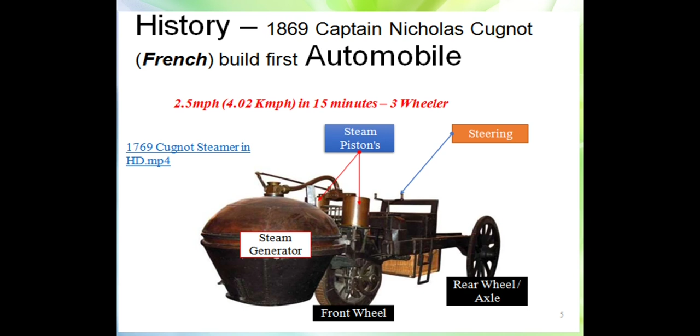History of automobile: automobile actually started with the innovation of the wheel. It is one of the major milestones of human history after the finding of fire. The first automobile was built by Captain Nicholas Cugnot in 1769 through a steam generator, with a speed of 2.5 miles per hour. It is one of the most innovative inventions - the first self-propelled vehicle.

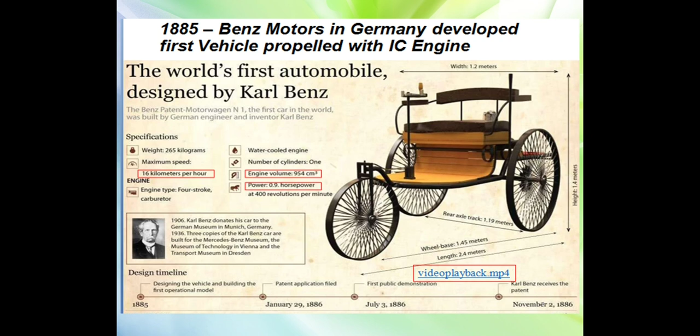It's called the IC engine. It was developed by Benz Motor in Germany in 1885.

In 1897, Foster from Crompton Greaves brought the first motorcar to India. In 1901, Jamshedji Tata had the first Indian-owned motorcar.

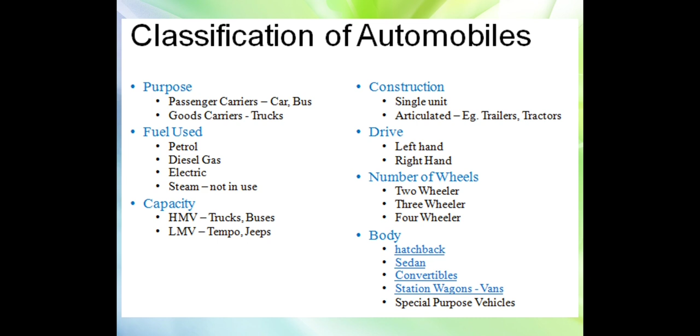The classification of automobile: automobiles are classified by purpose, fuel used, capacity, construction, drive, number of wheels, and body.

Main components of automobile: the engine - it is the heart of the automobile, the source of power. The frame and chassis - it supports the engine, wheels, body, braking system, and steering system. All the components are supported by the frame only.

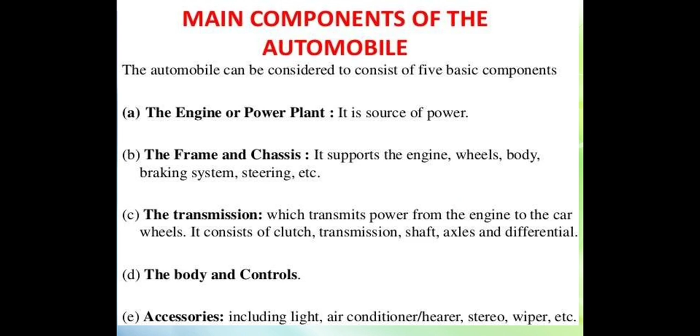The transmission transfers power from the engine to the rear wheel. It consists of the engine, clutch, transmission, shaft, rear axle, and the differential unit. Body and control - this includes the control system and accessories including lights, air conditioning system, heater, stereo and wiper, etc. Now let's look at the exploded view of the automobile.

Look at the exploded view of the automobile: cylinder, gasket, engine block, cylinder gasket, head gasket, engine block, oil pan gasket, and the crankcase - another name for this is oil pan. Inside are the exhaust and intake manifold. Another term given is the valve arrangement mechanism.

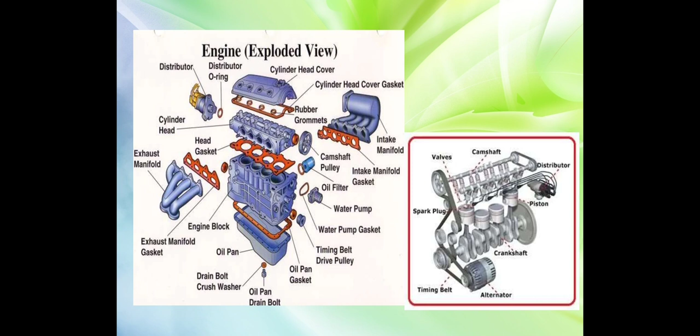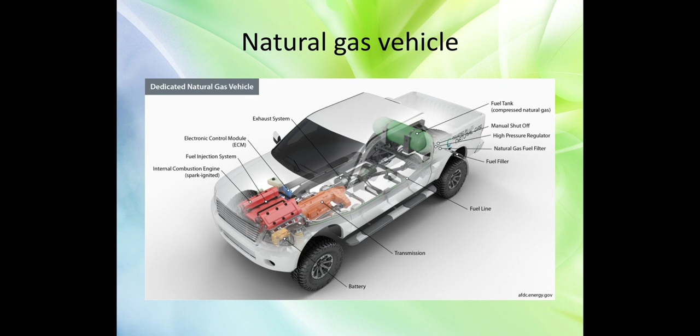Next we discuss recent developments in automobiles. Natural gas vehicles have recently been developed. Natural gas vehicles in India are also contributing to this natural vehicle trend. The reason we are moving to natural gas vehicles is to reduce emissions from vehicles.

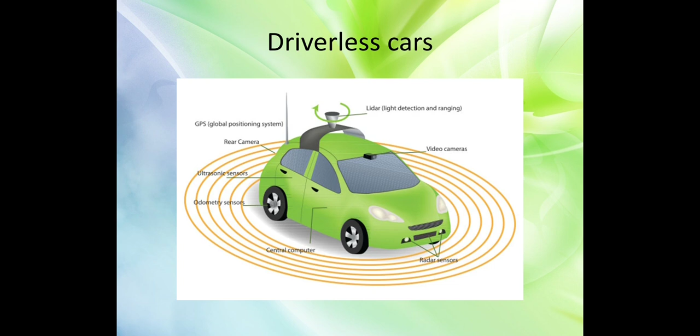Driverless cars - Google has already developed these and successfully run them in Japan, the United Kingdom, and America. India does not yet have sufficient infrastructure. Once good infrastructure is developed, it will be possible to drive driverless cars in India.

Bulletproof cars are generally used for political leaders and many VIPs. Anti-lock braking system (ABS) is recently developed. The Indian government has imposed on companies that they must build in ABS for all vehicles after production, starting in the year 2017. With ABS, it gives perfect control of the vehicle while driving.

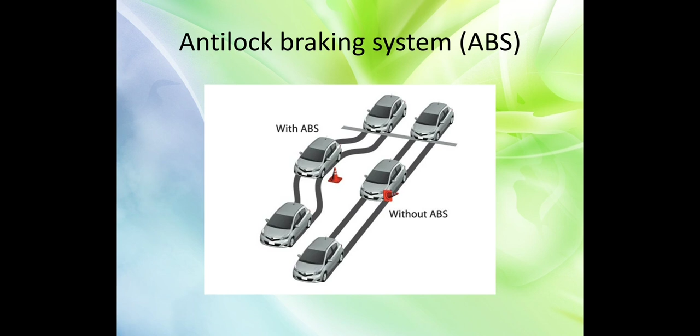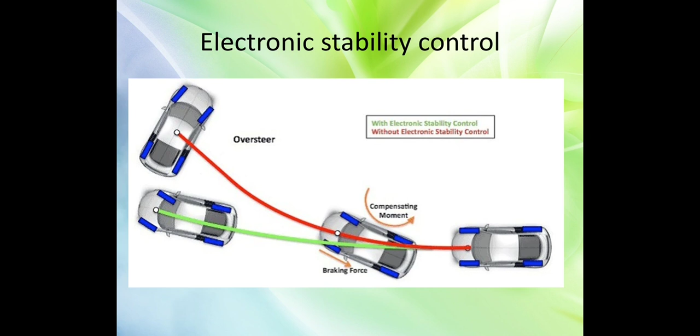Electronic stability control - nowadays even in a minimum price car, around 8 to 9 lakhs, electronic stability is built in. It monitors the contact between the road and tire at high speed and on wet surfaces. It gives perfect control and ensures vehicle stability. This is one of the developments.

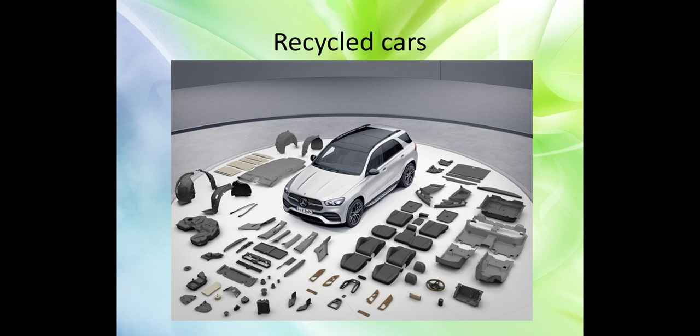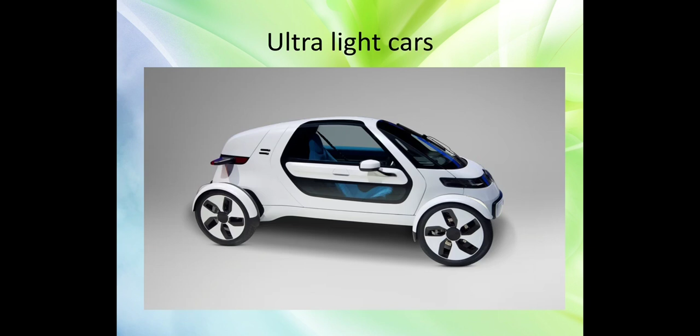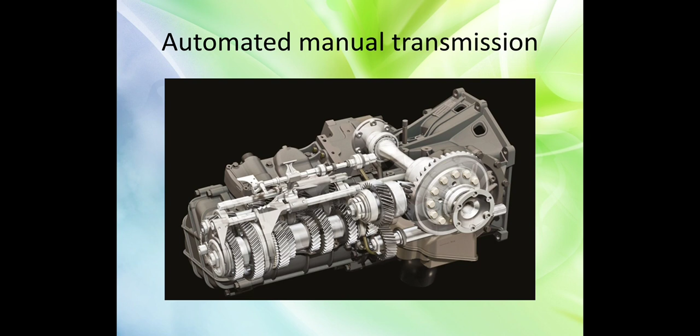Ultralight car - we can reduce the weight of the car, making it possible to achieve the most mileage and stability while traveling at high speed. Automated manual transmission - nowadays many top-rated cars have automatic transmission built in, which minimizes or optimizes fuel efficiency as well as providing better transmission. It ensures better transmission while driving long distances or in city driving.

Pre-collision technology is also built in India but is actually a failure, since it is not able to measure the distance properly. Collision technology is successfully running in Benz and BMW cars in India, where it automatically applies the brake when a human or moving object arrives in front of the car.

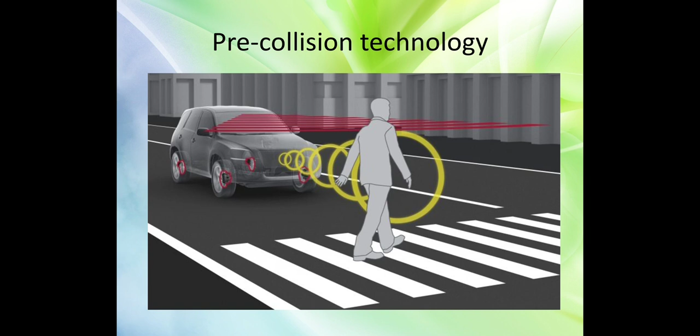And then hydrogen car. Hydrogen car is one of the best alternatives because hydrogen is available in greater sources in the atmosphere.

Let us discuss energy engineering. Energy engineering is a broad field because alternative energy is nowadays growing due to fossil fuel issues, while other engineering fields were slightly down because of high usage of resources. That's why energy engineering is developing and the growth rate of this field is very high.

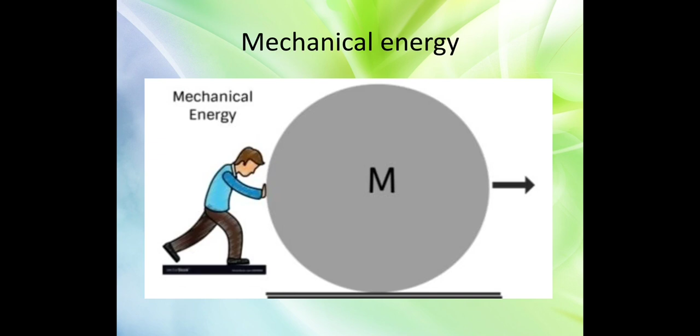Different forms of energy are broadly classified: mechanical, electrical, electromagnetic, chemical, nuclear, sound and thermal energy. This is an example of mechanical energy. Mechanical energy is nothing but work done with the help of force.

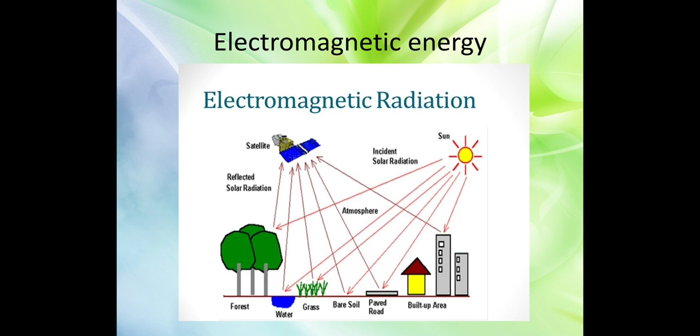The electromagnetic energy, electromagnetic radiation, is all the energy we are having from the sun. It's chemical energy - all the fuels, and every natural or man-made compound is combined by chemical energy.

And nuclear energy - we already studied nuclear energy in school days. Nuclear energy is an enormous power source, available sustainably for 100 years. So India should concentrate on nuclear energy with the help of Russian technology.

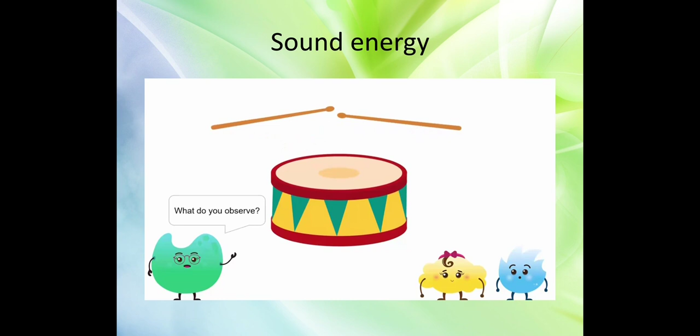Sound energy, yes, sound energy. Study about sound energy - the rhythmic sound you hear from nice musical instruments. All musical instruments come under sound energy.

Thermal energy is nothing but heat energy. Sources of energy is a main topic: solar, wind, tidal, geothermal, biomass, ocean thermal, hydel power, nuclear, and energy from fossil fuel.

There is solar energy which we get from sunlight through PV cell, which is a photovoltaic cell. It should be used for various purposes at home.

Wind energy should be converted from kinetic energy of wind to electrical energy. Tidal energy is generally generated by the ocean with the help of waves. By using the wave, we can generate power, and this can also be used for the river bed.

1000 meters downside, that place has a temperature around 5 degrees Celsius, while the top has 25 degrees - this temperature variation. We can use the temperature variance to generate electrical power.

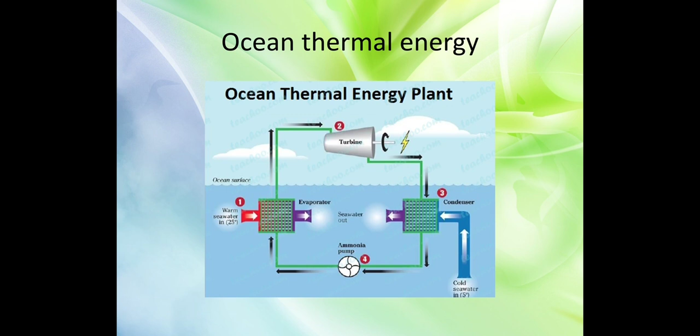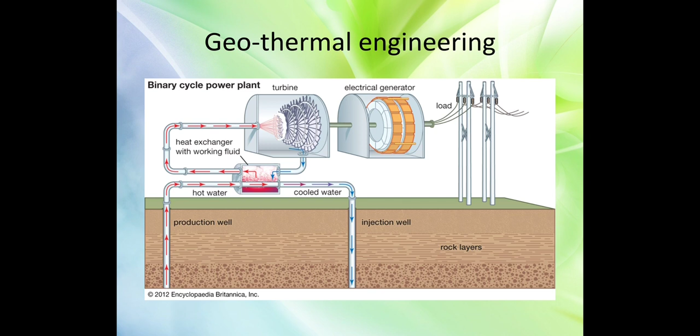Next unit, we have hydel power plant. At that time we can discuss in detail how to develop a hydroelectric power plant for electricity.

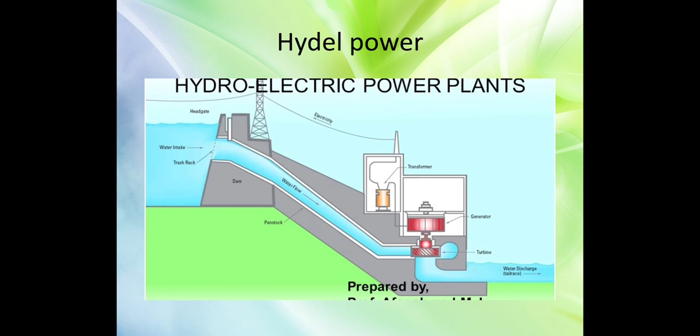Energy from fossil fuel - it is a fossil fuel. We can use it for cooking, car fuel, and electricity. It is possible to produce energy from fossil fuel.

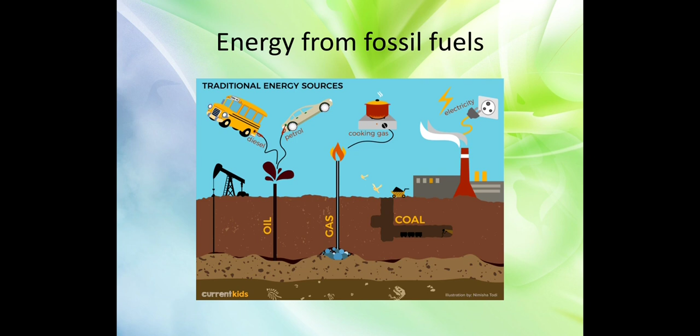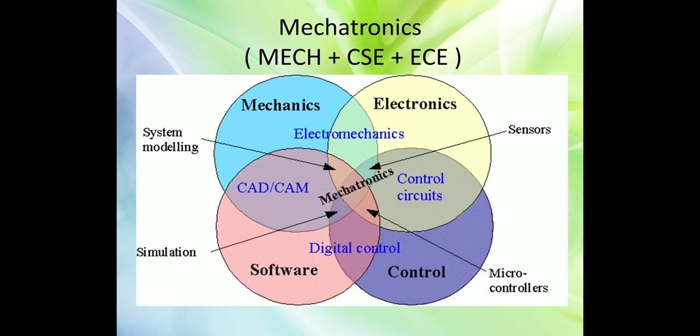And then, if time is available, we can continue learning about the interdisciplinary concepts in mechanical engineering. First we discuss mechatronics - it is a combination of mechanical, computer science, and electronics and communication engineering. Recently developed in the field, it gives huge job opportunities for all departments.

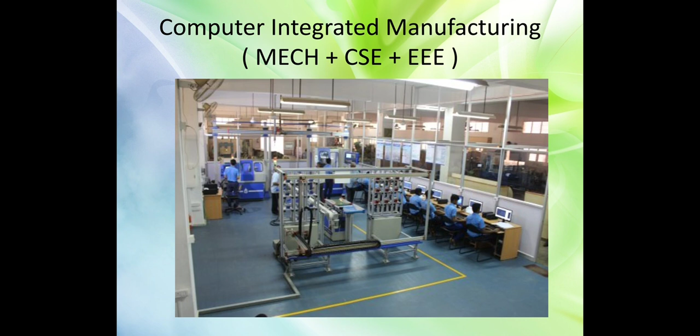Computer integrated manufacturing system is a recently developed mechanical field. It has the component CNC, built in with programming. Electrical and electronics engineering developed the circuit for the manufacturing.

Instrumentation engineering is mechanical, EEE and ECE engineering combined. Aerospace engineering is combined by mechanical, aeronautical and astronautical engineering.

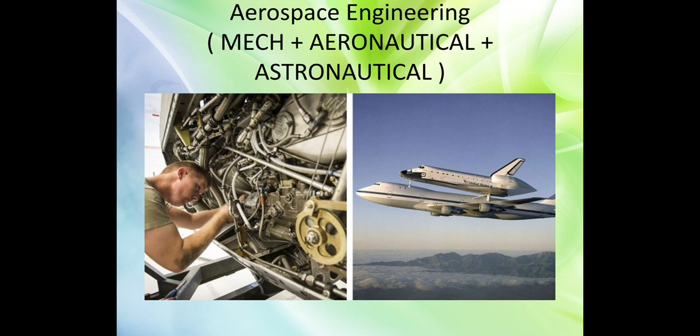What is the difference? Aeronautical means flight - we study aerodynamic characteristics at the ground level. Astronautical means we study the same aeroplane at space. That's called astronautical. Thank you for listening.

Today we definitely learned a lot of information about automobile engineering, energy engineering, and we also discussed the interdisciplinary concept of mechanical engineering.